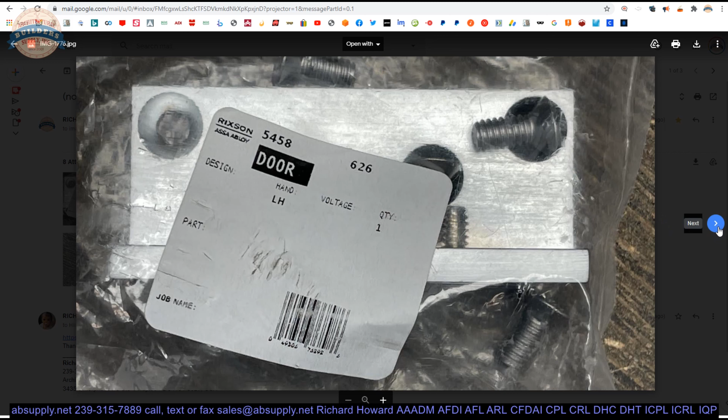Something is going to scratch. I don't know where this is manufactured, but my guess is there's thousands upon thousands of miles on this hardware before it gets into your hands. So I'd like for them to insulate those screws. You're paying for finished hardware, not rough industrial hardware.

There's that evidence there and there. Possibly that as well, but that appears to be finished over. But these blemishes, while they're superficial, they exist. They don't need to exist.

There's your bracket shown close up. Now they say that this is 626. My magnet tells me that it's thoroughly non-magnetic, so that means it's made of aluminum.

That would be as if you were looking at it upside down. Would probably be far better to show that like this. You know, if you were standing on a step stool and looking at the face of the door, you're probably going to see that.

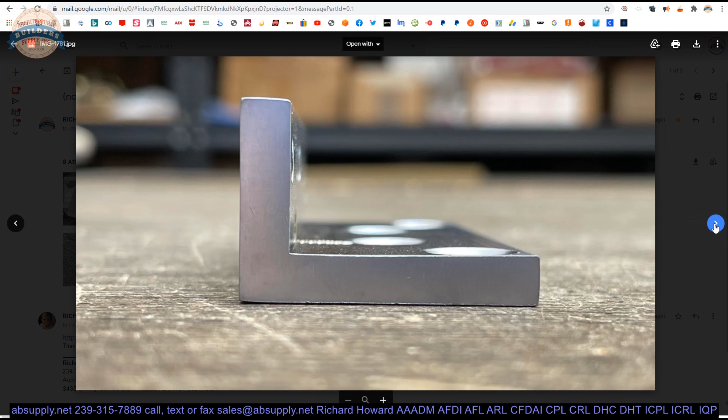I'm also concerned about the location of that screw hole with those holes being shown. Top view, so to speak. End view, again, shown on its end. It should probably be rotated 90 degrees counterclockwise.

We'll get those images flipped around so they look a little more natural. And there are the fasteners that are included. Extended description information down below.

This is a left hand. They are handed when they were being installed in this fashion.

Now there is a link below this video to the cut sheet, and here it is. The cut sheet is literally just a reference to where the brackets are mentioned in the product brochure. So here's our 5458, or 5459, the opposite hand.

Let's read this. When surface-mounted units are mounted, I'm going to read it a little differently. Surface-mounted unit, I think it's easier to digest. Surface-mounted unit on the push side on a rabbited door.

So the 8 or 9 series this works with is our surface-mounted units. When you're putting them on the push side of the door, and that door happens to have a rabbited top rail and a matching rabbited bottom rail in the transom.

Or you have a flush door and transom, again on the push side. So this is all just one method, regardless of it being rabbited or not, push side transom application.

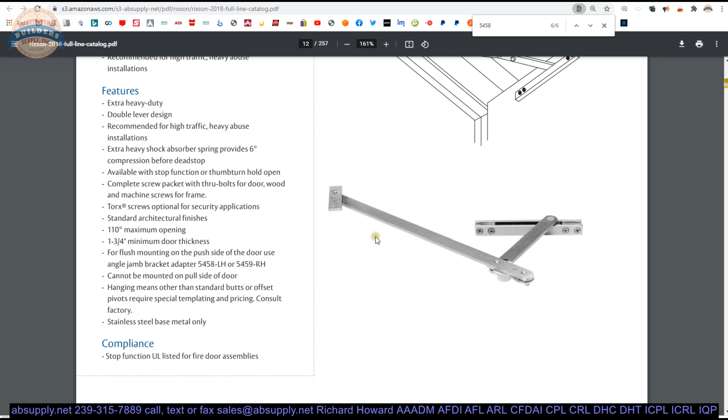I would imagine you can't, and here's the product catalog, by the way. And indeed, we've scrolled up to the 8 HD series, that model with the elbow, and I am thinking to myself, well, that won't work on a pull side, and it doesn't, naturally.

And it states here, single acting doors, push side mounting only. So make sure that your model will mount on the pull side. You know, the standard 8 series, or the 9 series I should say, is going to be able to be mounted on either side.

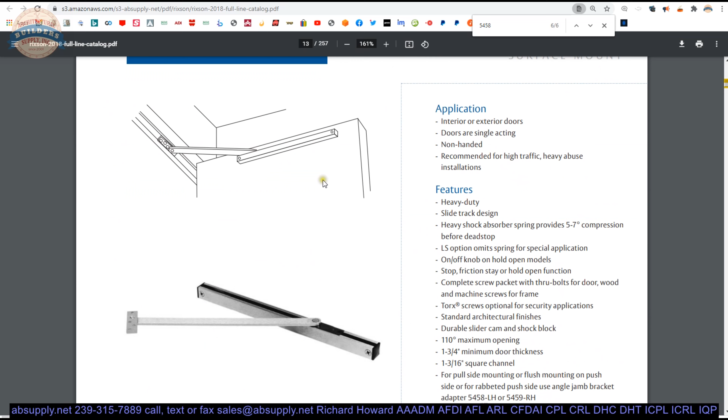And when we look at this, you can start to internalize and figure it out. But speaking of internalizing and figuring it out, in the product catalog on the 3rd page, I think, nope, 4th page, so they literally give us the answer key to the test.

So we were talking about what they call method 1 and method 2. It's the same method. There's no difference except that this is rabbited and this is non-rabbited. Okay, and then of course your pull side mount. Okay, so that's where you're going to use these brackets.

Overhead door stops and holders are among the most difficult hardware when it comes to nuances, whether it be learning the School of Hard Knocks, learning how they must be specified based on the method of hanging, what the maximum degree opening for a door is, which happens to be 110 degrees, by the way. You won't see a template for any overhead stops and holders that shows you a chart past 110 because it doesn't exist.

Learning the side on which you're going to mount something, and learning the hard way that, well, here's the application. This is an auditorium. And this is probably not a good example.

This is the auditorium, but it's not in a path of egress, so you probably want all your hardware on the opposite side, or it could be that same auditorium leading out to an anteroom, so that would be on the interior back of house. My point is, when you're thinking about where to put the hardware, think about where you want to see it, or where you don't want to see it.

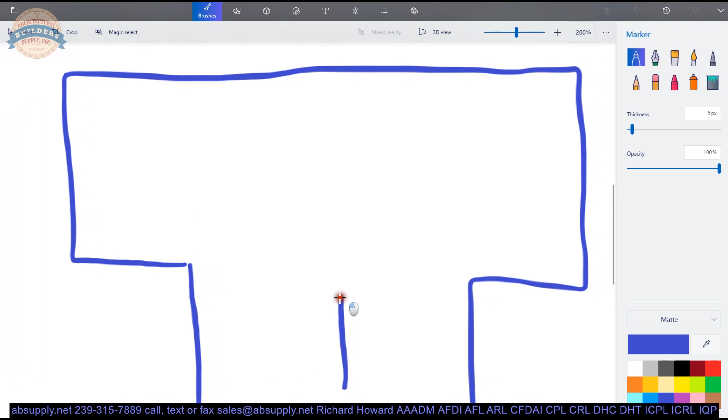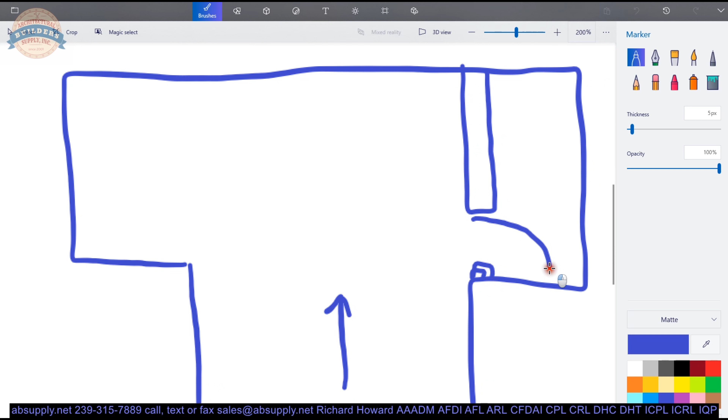Just to illustrate what I'm saying - here's the walkway, not very much to scale. You've got a door, that's your men's room, here's your women's restroom. If this dimension in here is too small to accept that closer, you're going to have to put that on the push side.

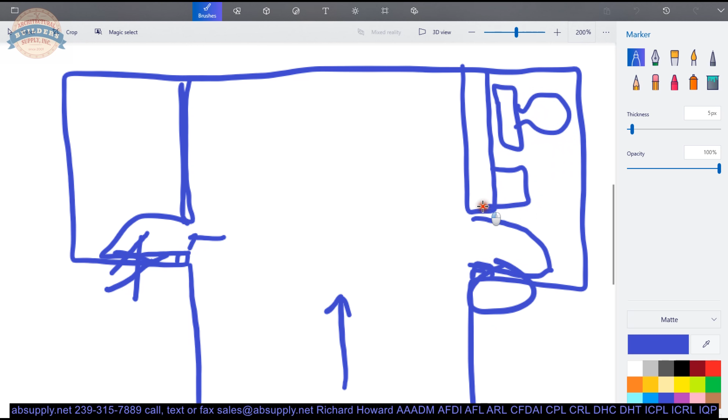But that's a primary example of where you're going to want to have that sort of information, to understand what you're dealing with.

Okay, so that covers this portion of illustrating what the material is used for.

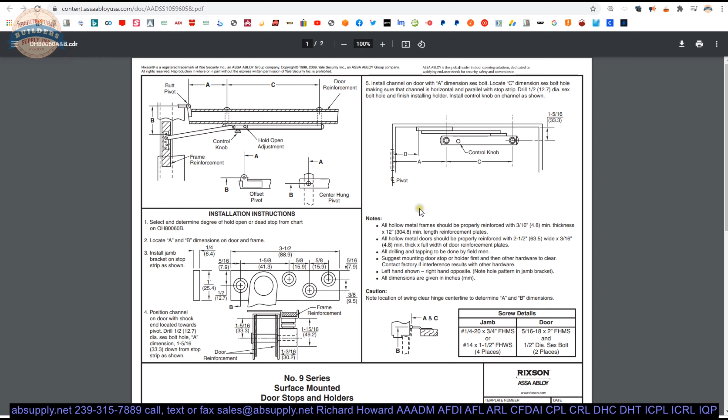Here's a template, and that's what this item looks like. It's always going to be shown in a push side standard frame application, so when you don't have the soffit of the frame to receive that jamb portion, that's where you're going to use this bracket.

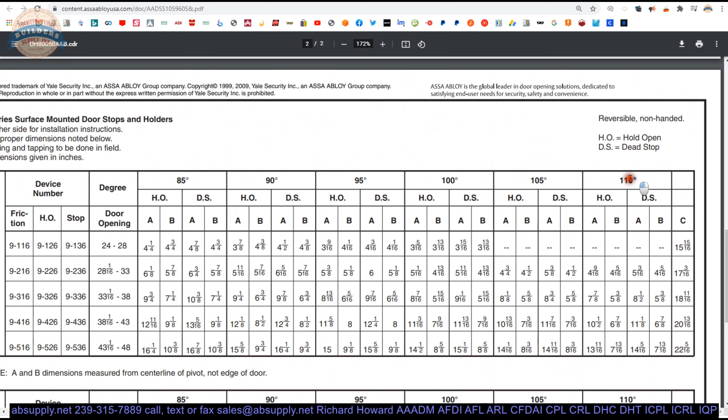As I had noted earlier, you won't see anything, a chart that has greater than 110 degree. It doesn't exist.

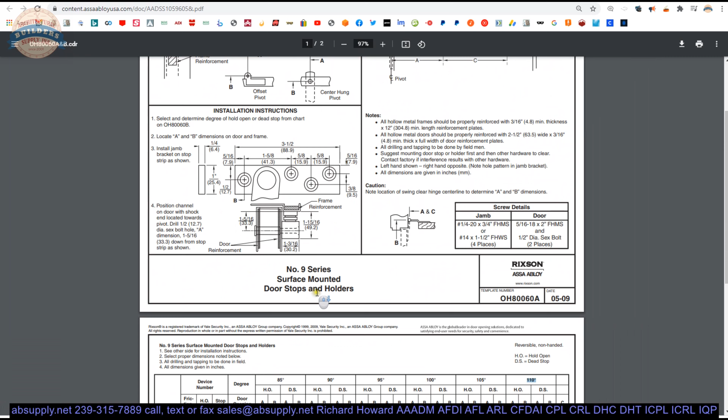As I had said earlier, you do have to incorporate the means of how you've hung the door into all of your templating. Word to the wise, if you're using a concealed hinge like SOSS or Tectus or McKinney - they make those, that's sister company to Rixson, or Sugatsune - that has to be specified because the templates might have to be special made for that application.

Okay, let's wrap up this video on camera.

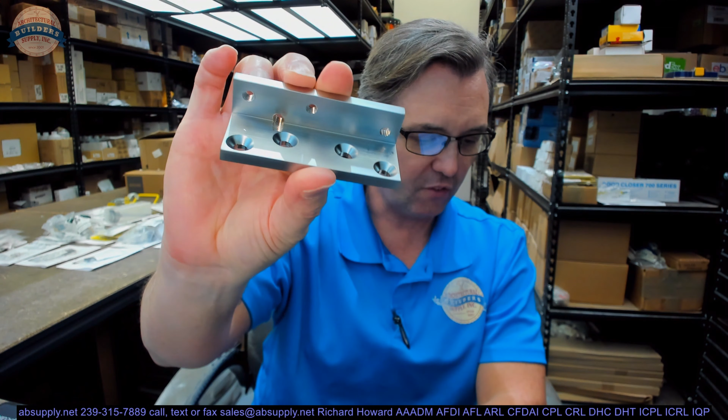In conclusion, this video is just to beleaguer the finer points of the 54-58 mounting bracket for the Rixson overhead stop holder. The name Rixson is utterly synonymous with certain products.

I think mostly it's because they probably had a major hand in inventing the entire product category. We have some really old catalogs on that manufacturer's page that you would be able to review in order to see how many decades pivots have been around.

Rixson is also known for floor closers - they're the name most synonymous with floor closers. I think the reason for that ubiquity of the product line, and how much a synonym the name Rixson is for floor closer and pivot, is because they've been doing it since - I don't know what year in the 19th century their first catalog came out, but it's definitely a long time ago in that range.

Any questions on the 54-58 flush mounting bracket, left hand, or any other Rixson product, please feel free to reach out to us. Obviously, finishes can be done as well to match your hardware. Thank you very much.